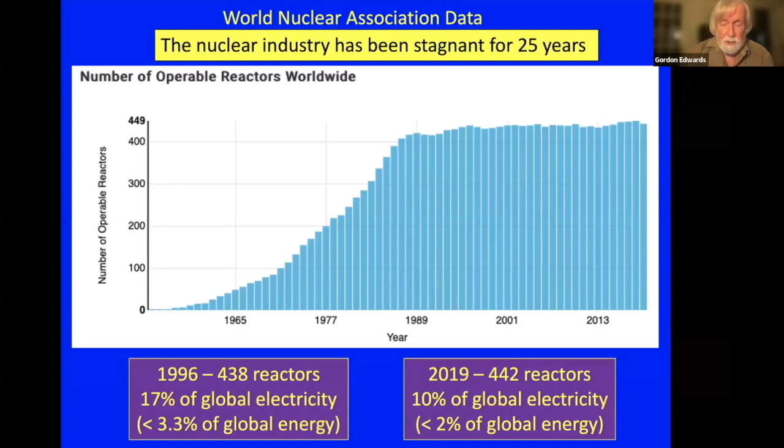And the actual share of global electricity provided by nuclear has gone down in that period from 17% to less than 10% today. And of course, electricity is only one slice of the energy pie. So that 17% 25 years ago represented only 3.3% of global energy. And today it's less than 2% of global energy. So when people talk about nuclear energy as a savior of the climate crisis, one has to be very skeptical of the potential of nuclear to fill that enormous gap.

So the nuclear industry has realized for a long time that this stagnation is not good for the future for them. And so they launched what they called a nuclear renaissance around 2001. And at that time, they were anticipating that hundreds and maybe thousands of new reactors would be built around the world. Large reactors, we're talking here about quite large reactors, not the small ones that they're ballyhooing at the present time. But this did not work well. In fact, there were only a handful of orders.

And Westinghouse, in fact, bankrupted itself trying to build 4 large nuclear reactors down in Georgia and South Carolina, the AP1000 model. They had to declare bankruptcy. They've come out of bankruptcy since then, but they suffered $9 billion in losses from new nuclear projects. And in fact, South Carolina abandoned 2 of those 4 reactors, even though they were largely built. So they wrote off billions of dollars in debt. And the 2 in Georgia are now operating, but at a great cost.

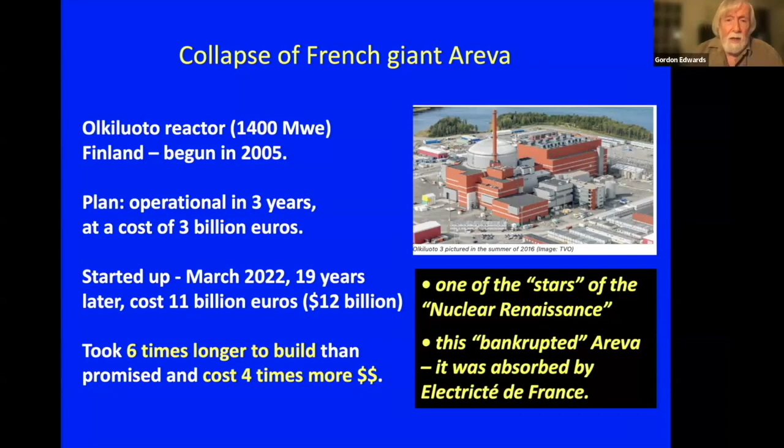And in the United States and Europe, it steadily declines to between 3 and 5% of the market, constituting a potential for market failure. In other words, nuclear might simply price itself out of the market altogether. This was also reflected in the bubble.

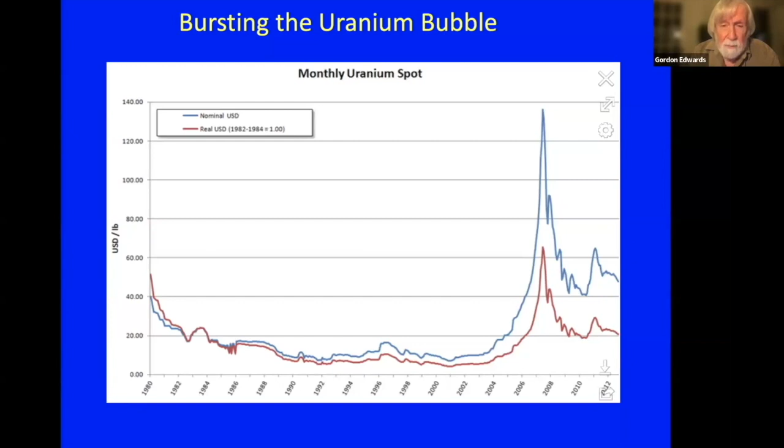You might remember the boom in uranium prices back around 2008. This is, by the way, before the 2011 triple meltdown in Fukushima. The price of uranium soared to a very high degree based on speculation about this nuclear renaissance, which in fact never really happened. And consequently, the price immediately dropped back down again and dropped even further down after the 2011 triple meltdown in Fukushima. So it was all based upon a bubble, a speculative bubble that never materialized.

So let's take a look at the competition. The competition in terms of non-carbon emitting energy is, of course, renewables. Renewable energy is primarily hydro as a solid baseload electricity, and then the more intermittent wind and solar. Well, if you compare the key expansion periods of innovative technologies using this same period, 2010 to 2020, this is the same period where the nuclear renaissance was supposed to be occurring.

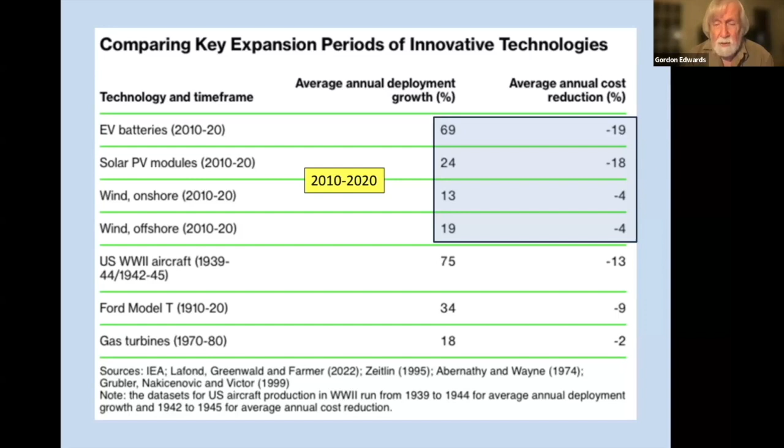And you will notice that the annual deployment growth of batteries, solar modules, onshore and offshore wind was very high. They were increasing on the average 24%, 13%, 19%. In the case of storage, 69% per year. And at the same time that it was growing in capacity, these same technologies were dropping in price like a rock. For example, solar PV modules, that's solar photovoltaics, were dropping by about 18% per year in terms of price. So the price was dropping like a stone, and it made it much more affordable. And very quickly, it outpaced nuclear, which was getting more and more expensive as time went on. The renewables were getting cheaper and cheaper and more abundant.

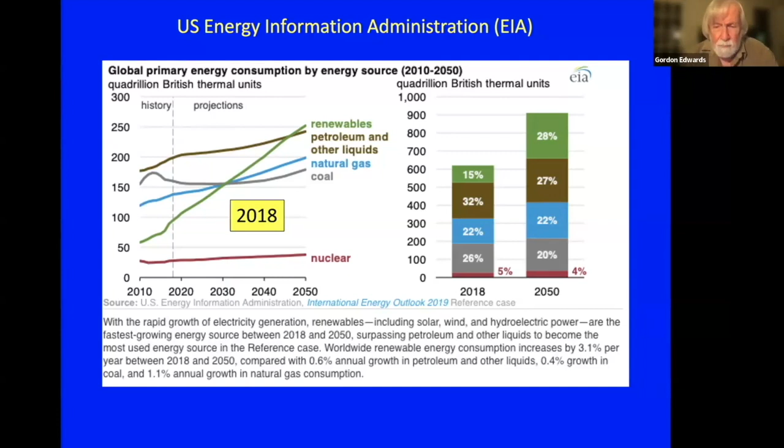So the bar graph on the right shows that even the bottom level, which is the nuclear, even while it's increasing in quantity, it's decreasing in market share. So it's going down, for example, here from 5% to 4%. So that's basically the problem that nuclear has. It's got much cheaper alternatives, the competitors that it's combating with for the market share.

So nuclear is fighting an uphill battle because wind and solar at the lowest levels is more than 3 times cheaper than nuclear. So you can build 3 times as much, and it's much faster to deploy. So it means that you can build it faster, and you can also spend less money, and therefore have more money left to build more. So it sounds pretty obvious that nuclear is not the best investment if you want to get quick results. Obviously, the fastest and cheapest option is renewables.

And it's strange that Canada and the Canadian provinces seem to be placing an emphasis on nuclear, which is the most expensive and the slowest and the most speculative, because the nuclear projects that are being proposed have never been built before and they've never been tested before. Whereas the wind and solar, they have been tested, they work fine.

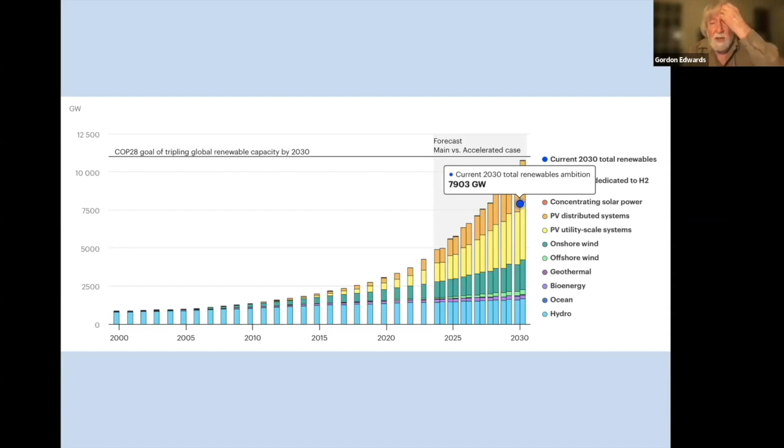Now, here is a COP28 goal of tripling global renewable capacity by 2030, showing what happens up to 2024. And already the renewables are doing very well. If you just extend that trend, you can see that it is perhaps feasible to achieve the tripling by 2030. Right now, the blue dot there represents the current ambition, the current estimate of 7,900 gigawatts. We're hoping that we can step it up and increase the installation of renewables by more than that to get

that tripling. Now, the International Energy Agency has predicted that in the next 10 years, 90% of all new electricity production facilities worldwide will be renewable.

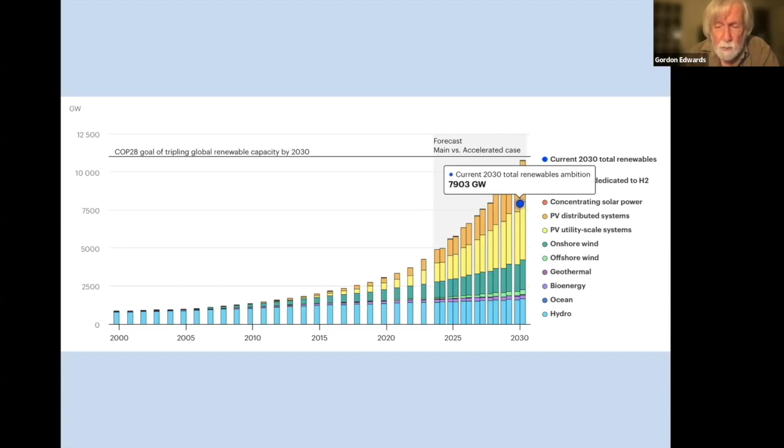So now, just as an indication, oftentimes people are concerned about the actual capacity of renewables to meet electricity needs. So I'm putting this in here. It's a little bit out of context, but the current electrical capacity in Michigan is a bit more than 30,500 megawatts. The potential for offshore wind in Michigan, according to studies that were carried out by, well, the article is represented there: Offshore wind in Michigan, great potential, many challenges.

The potential for offshore wind in Michigan is over 320,000 megawatts. That's more than 10 times the current capacity, and it's about 1/4 of total US electrical capacity. So there are great potentials if you take a look at what is possible to be done. Obviously, there are many practical obstacles that would interfere with that, navigation being one of them.

So let's now take a look at what the problem is with nuclear power. Why is nuclear power not able to compete better with the renewables? Why can't they strip down and produce cost savings and strip down the time? So let's take a look at the nature of the beast.

In 1943, Canada's first early involvement with nuclear came as a result of World War II plans. In 1943, our Prime Minister, Mackenzie King, met with Roosevelt and Churchill, and they signed an agreement to cooperate in building the world's first atomic bombs. Now, the reason why Canada was involved in that is because Canada was the main supplier of uranium. In North America, the only really readily available source of uranium was in Canada as a result of an earlier radium mine that operated in the Northwest Territories.

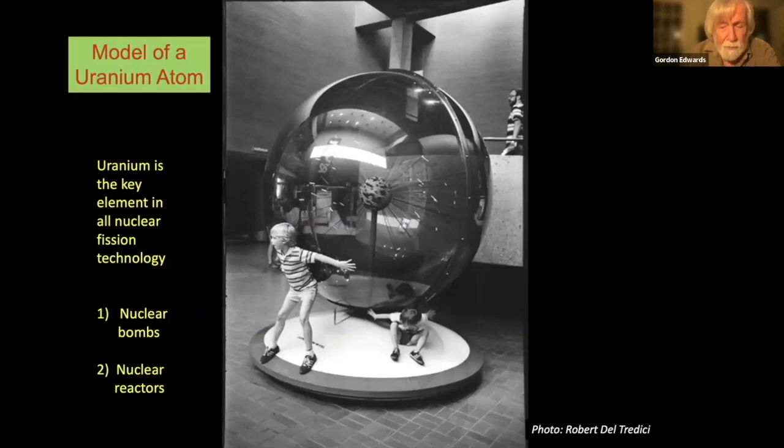This was first indicated way back in 1896 when Henri Becquerel in Paris discovered radioactivity of uranium ore. He discovered that if you took a rock containing uranium, it would give off a kind of invisible radiation that would develop a photograph, would cause shadows on a photographic plate, even though the photographic plate was wrapped in thick black paper.

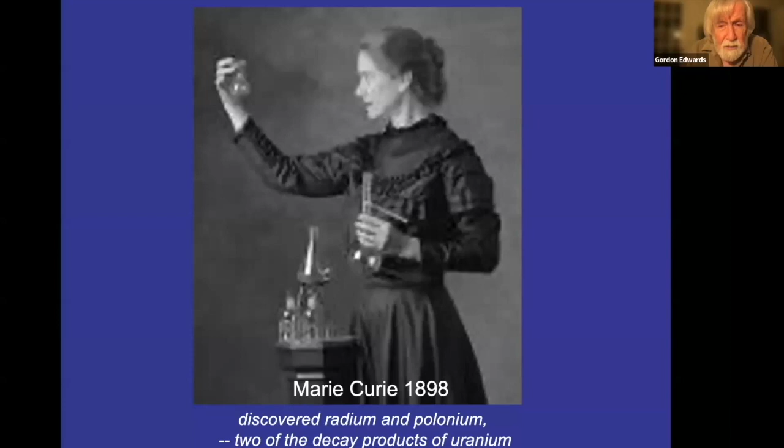Now, a couple of years later, Marie Curie, who was a brilliant chemist, crushed up the uranium rock that Becquerel was looking at, and she discovered that when you extract the uranium chemically, it is radioactive indeed, but the leftovers, the crushed rock, is actually much more radioactive than the uranium itself. 85% of the radioactivity is in the crushed rock. And she discovered two elements called radium and polonium that are actually byproducts of uranium.

By the 1920s, it was realized that handling radium is deadly dangerous. These young teenage girls, thousands of them, were used to paint dials with radium paint to make them glow in the dark without any external source of energy. And they developed horrible deaths from fatal anemia, from bone cancer, and from head cancers later on. First, it was demonstrated that they had something called radium jaw, where their teeth were falling out. And when the dentist tried to repair the teeth damage, the jaw bones would break at the slightest provocation.

So the jaws, the bones of the body, in fact, were being weakened. Later, there were fatal anemias and then bone cancers, an epidemic of bone cancers and head cancers. By the end of the 1930s, by the beginning of World War II, it was realized that radium was far too dangerous for any commercial use.

Meanwhile, underground miners developed lung cancer. The people who were mining the radium ore in Navajo country, and that was due to radon gas. And that was found out way back in 1930. They knew that it's the leading cause of lung cancer among non-smokers. Now we know that. And it was determined that it caused lung cancer in underground miners. For hundreds of years, this had been happening in Czechoslovakia without people knowing what the cause was.

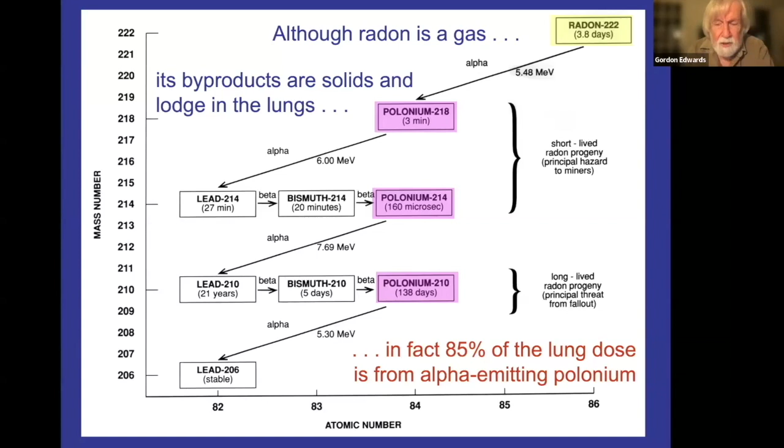Although radon is a gas, and if you breathe it in, you will breathe it out just as easily, it actually turns into solids. When the radon atoms disintegrate, they turn into polonium atoms, and polonium is extremely dangerous. Most of the damage to the lungs is done by the polonium that's deposited there.

It was at that point I investigated and I found out that polonium, according to the American Health Physics Society, is probably the cause of up to 90% of the deaths that are attributed to tobacco, because when tobacco plants grow, they use radioactive fertilizer on the crops, and radon gas produces polonium that is absorbed into the tobacco leaves and harvested and ends up in the cigarettes.

Meanwhile, the Los Alamos National Laboratory in Los Alamos, New Mexico, pointed out that weight by weight, polonium-210 is 250 billion times more toxic than hydrogen cyanide, which is one of the fastest acting deadly poisons that we know chemically. So the main point here is that tiny, tiny amounts of radioactive materials can be extremely dangerous.

Now, the radioactive disintegration that occurs, we now know, consists of giving off particles and rays, gamma rays, alpha and beta particles, which do a lot of damage to living tissue, in particular by damaging DNA molecules, causing biological organs to grow improperly, to grow abnormally, and leading to cancer and a number of other problems that can be very serious, including genetic disabilities that can be passed on to future generations.

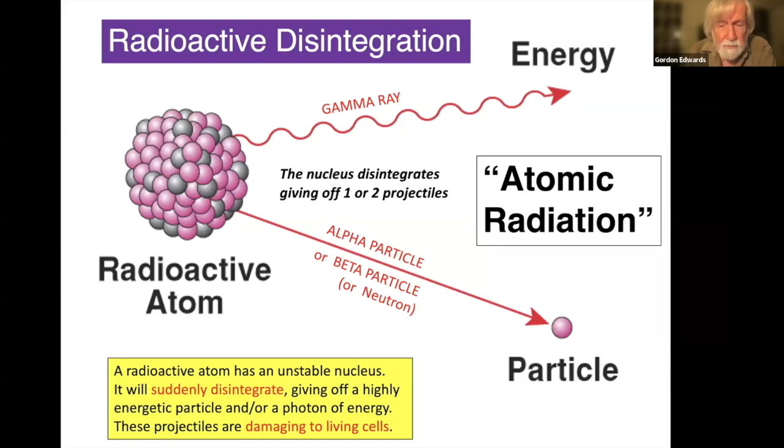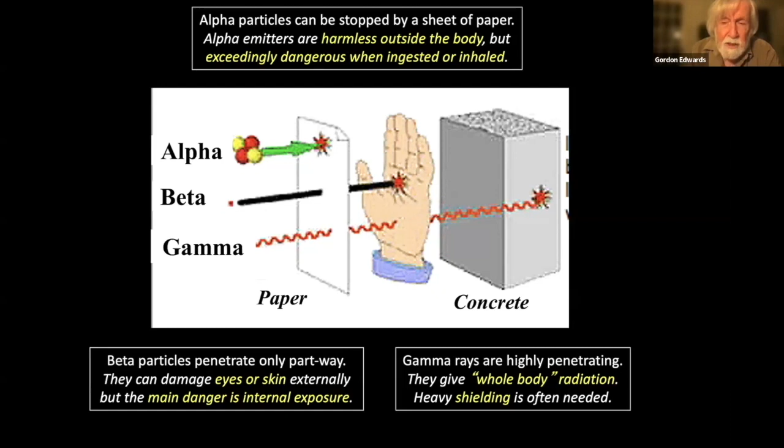Now, some of this radiation is not very penetrating, much to some people's surprise. For example, alpha radiation cannot penetrate through a piece of paper, and yet it's hundreds to thousands of times more dangerous than gamma radiation once it's inside the body. So if you have an alpha emitter that gets inside the body, it can do an awful lot of damage, especially since it lodges there and gives radiation over a long period of time.

But what it does is it damages the cells in the immediate vicinity, and those cells can many years later, up to 20 or 30 or 40 years later, develop into fatal lung cancers. And these lung cancers have a very high mortality, well over 95%.

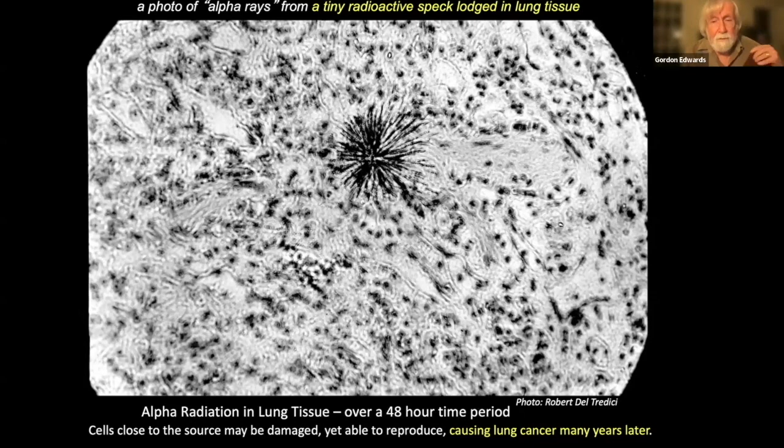So they knew this way back in 1931. As early as 1931, there were documents produced by the Canadian Department of Mines stating that lung cancer, bone necrosis, and rapid anemia are possible diseases due to the deposition of radioactive substances in the cell tissue or bone structures of the body.

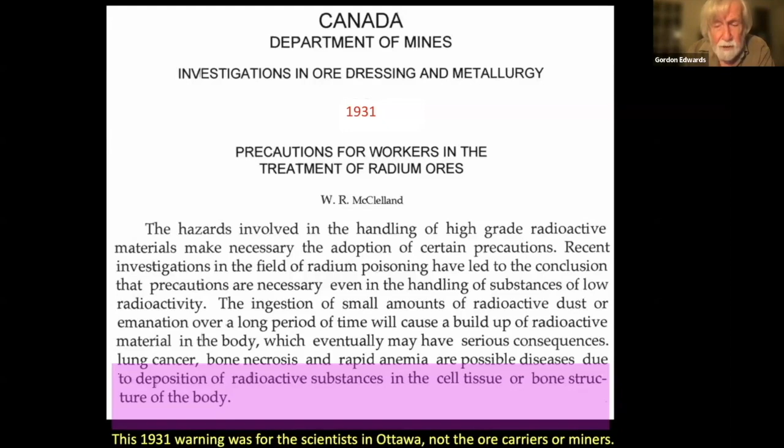This warning was for the scientists in Ottawa who had to handle small amounts, not the ore carriers or miners in the Northwest Territories who actually faced large exposures from this material. And as a result, the village up in the Northwest Territories called Deline is now sometimes called the Village of Widows, because so many of the men have died as a result of exposure to this radioactive material.

Now, when we mine uranium in Saskatchewan or elsewhere, we leave behind the crushed rock, which Marie Curie looked at. These are the radioactive uranium tailings, and they contain all the polonium, all the radium, and all the radon gas that was in the ore originally. And the effective half-life of this material is 76,000 years. It'll take 76,000 years for the amount of each one of those materials to diminish by a factor of a half.

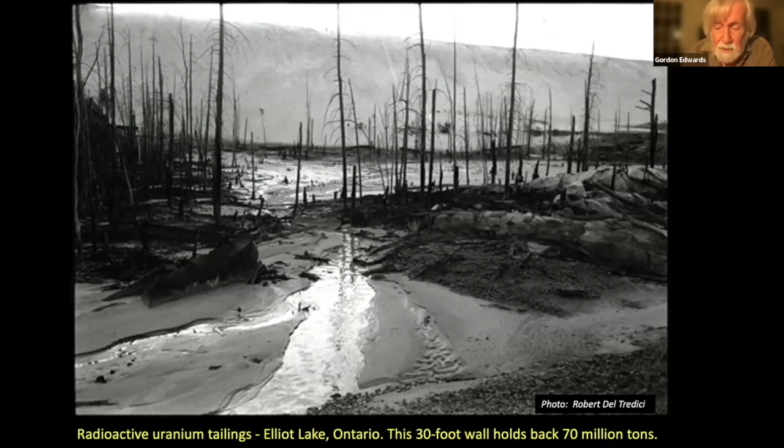This 30-foot wall that we show here is in the Elliot Lake area of Ontario. It holds back a lake of 70 million tons of radioactive sand from uranium mining. A permanent legacy. Radioactivity is a form of nuclear energy that cannot be shut off, and that's why we have a nuclear waste problem.

So everything changed in 1938. Christmas 1938, all of a sudden they discovered that trigger that was not known before. That trigger is called a neutron. A neutron can actually act as a trigger to release an awful lot of this nuclear energy all at once by starting what's called a nuclear chain reaction.

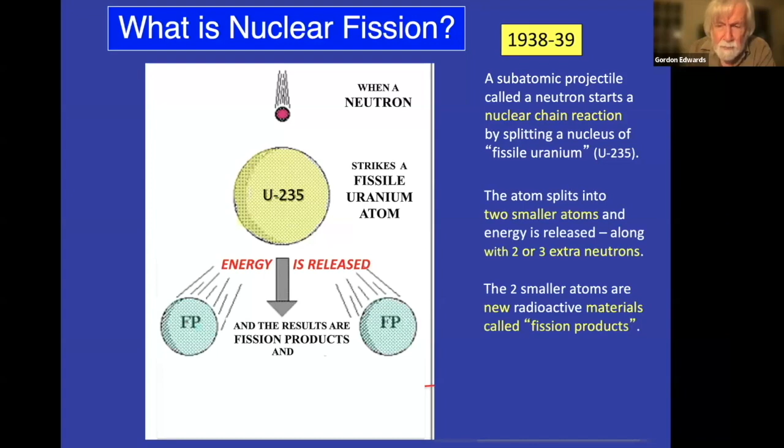When a neutron hits an atom of uranium-235, a rare form of uranium, it can split the nucleus and you get two smaller atoms given off, which are called fission products, along with 2 or 3 extra neutrons. Those extra neutrons trigger more fissions, and some go on to produce even more radioactive waste than the fission products. So this is where the radioactive waste comes from in a nuclear reactor or in a nuclear bomb. And this is where the energy comes from as well.

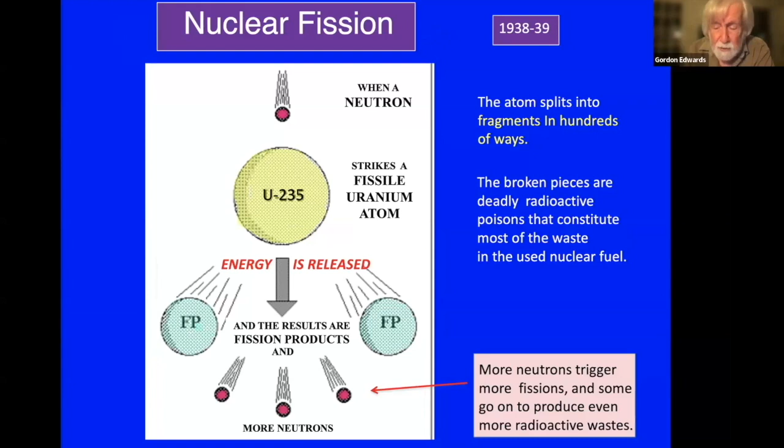So in Canada, although we contributed to the atomic bomb project by selling uranium to the American military, we decided to go for the peaceful uses of nuclear energy. And we built CANDU fuel bundles and CANDU reactors that could harness this energy hopefully for good, so that we could produce abundant energy without emitting carbon dioxide, although that was not a major consideration originally. Now that's certainly an advantage.

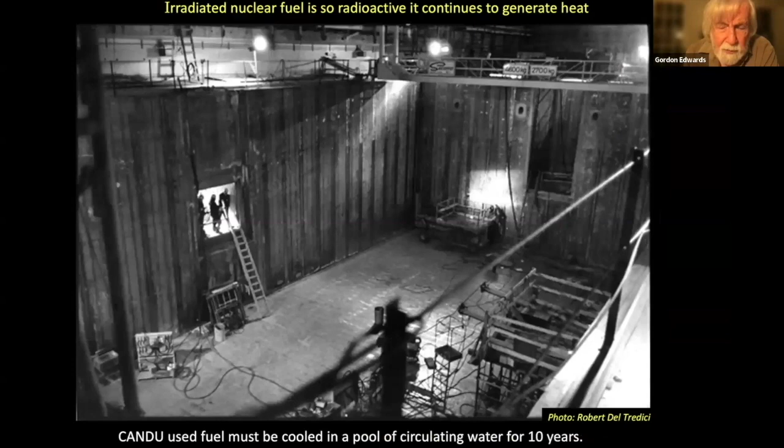And so the heat from the disintegrating atoms in a nuclear reactor is sufficient to melt the core of the reactor, even after the reactor is shut down. So if you shut down a reactor immediately, you still have about 7% of full power heat being generated by the radioactivity alone. And that's enough to melt the core of the reactors. That's what happened at Fukushima back in 2011. Those reactors were safely shut off before they started melting down.

In Canada, we have a spent fuel pool about 40 feet deep, in which the fuel has to be stored. The used fuel has to be stored for about 10 years in circulating water in order to keep the fuel from overheating spontaneously, which it will do if it didn't have that cooling water there.

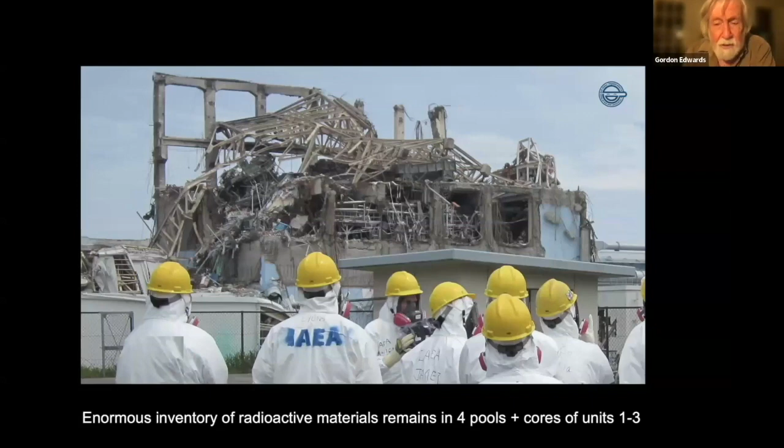Here is the result of that kind of an explosion in Fukushima. The reactor is really destroyed, not by the tsunami, not by the earthquake, but by the internal forces of the uranium fuel in the reactor. It's just the heat generated by the reactor and the chemical reactions induced by that heat that caused this destruction.

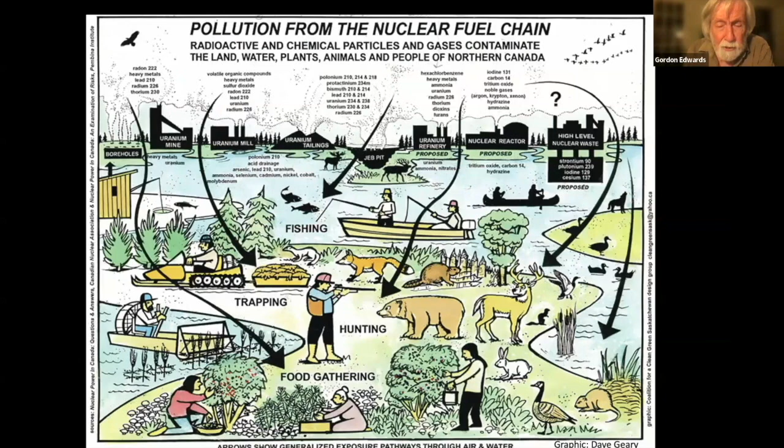Dave Geary of Saskatoon made this wonderful graphic showing how radioactive materials are materials after all, and they do have chemical properties. And depending on their chemical properties, they go into the food chain, the water, the air, and the human body, and they follow the same pathways that non-radioactive materials would follow. For example, radionuclides are chemical substances that are also radioactive, and they go to different organs depending on the chemistry.

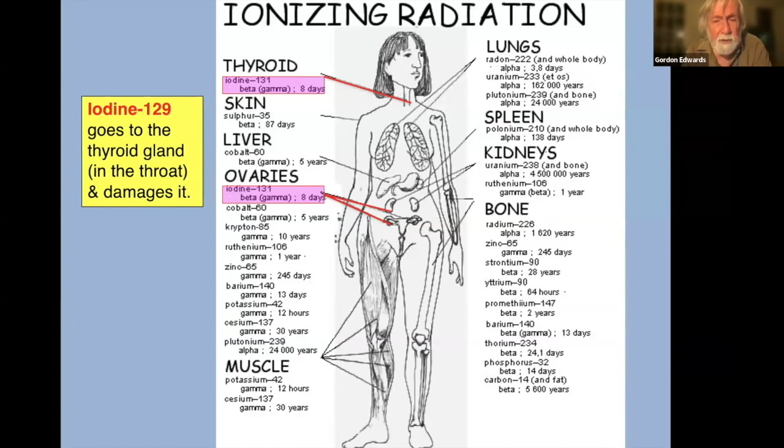For instance, iodine-129 or iodine-131 are radioactive versions of otherwise non-radioactive iodine. Iodine in nature is not radioactive, but these ones are. So nuclear power creates what you might call radioactive twins of non-radioactive materials. It goes to the thyroid gland and it damages it and causes thyroid cancer and other disorders. Cesium is another example. It goes to the soft tissues of the body, the blood and the soft organs, and therefore it contaminates meat, makes it unfit for food.

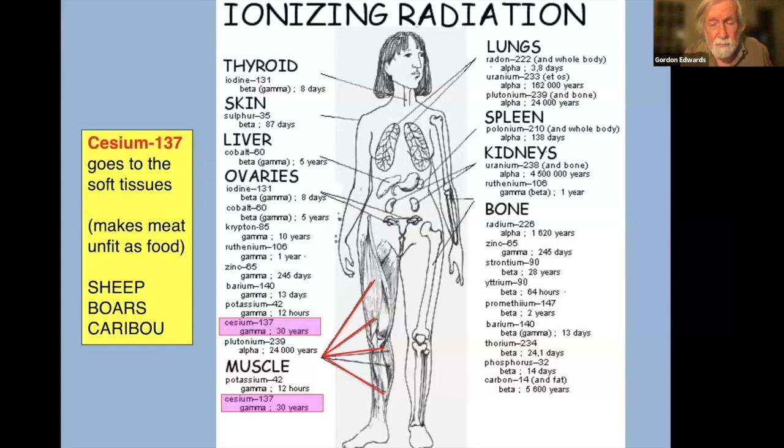For example, sheep farmers in northern England and Wales could not sell their sheep meat for 20 years after the Chernobyl accident because of radioactive contamination of the meat. Even today, hunters in Germany, Austria, and the Czech Republic, if they kill a boar, they can't eat the meat because it's too radioactive. The boars are very good at accumulating this radioactive cesium into their tissues. Here in North America, the caribou received more radioactive fallout than any other animal from the Chernobyl accident.

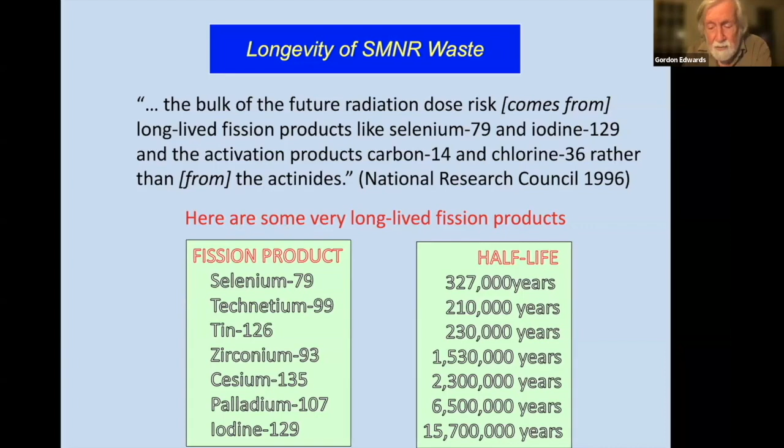And as for the longevity of these wastes, the bulk of the future radiation dose comes from long-lived fission products like selenium-79. Notice selenium-79 has a 327,000-year half-life. Technetium-99, a 210,000-year half-life. Cesium-135 is a 2.3 million-year half-life. Iodine-129 is almost a 16 million-year half-life. So that's why these wastes remain dangerous for a very, very long time. It's not a question of just waiting for a few decades. No, you really have to keep it out of the environment of living things forever if you want to have a hygienic environment.

As I mentioned earlier, the lethality of a freshly removed fuel bundle is such that a person standing within a meter of it would die within an hour. He'd get a lethal dose in 20 seconds, but it'd take him an hour to die. Now, a fuel bundle looks solid, but radioactive materials do leak out through tiny pinholes and cracks. Severe fuel damage causes massive leaks. And of course, if you have a meltdown, then you get a huge release of radioactive materials.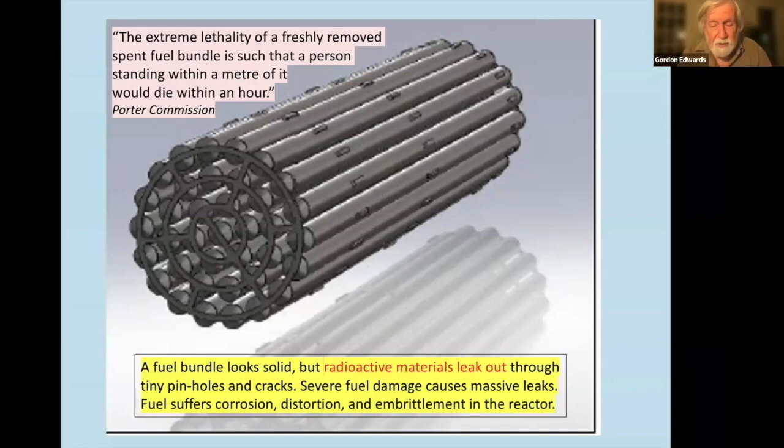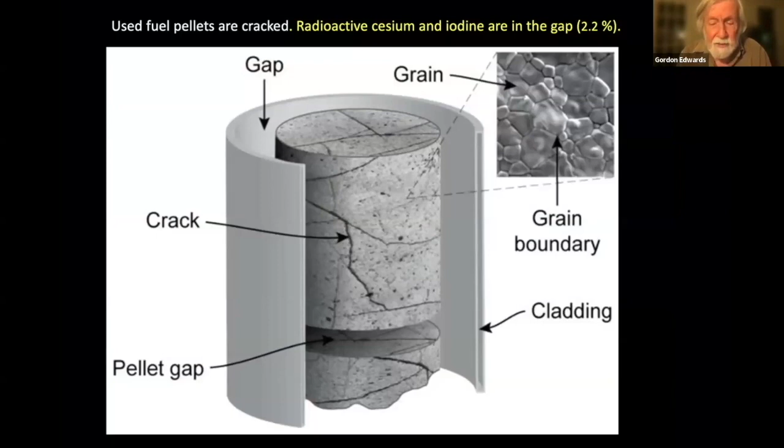As the fuel pellets, I showed you one of those fuel pellets earlier, they look very solid. They're solid ceramic materials originally, but in the reactor, when they're being used, they crack and they fissure, they become fractured. And a lot of the radioactive materials end up in the gap between the pellet and the cladding, the coating outside it. And so therefore it can be released immediately as a kind of a gas. This is true of radioactive iodine and radioactive cesium in particular.

When a CANDU reactor is operating, all the new radioactive materials are created in the core, the reactor core where the fuel is. But because the fuel bundles do leak, some of that radioactivity goes throughout the primary heating system, and the central part of the steam generator ends up being highly radioactive, because of the accumulation of material that's leaked out of those fuel bundles.

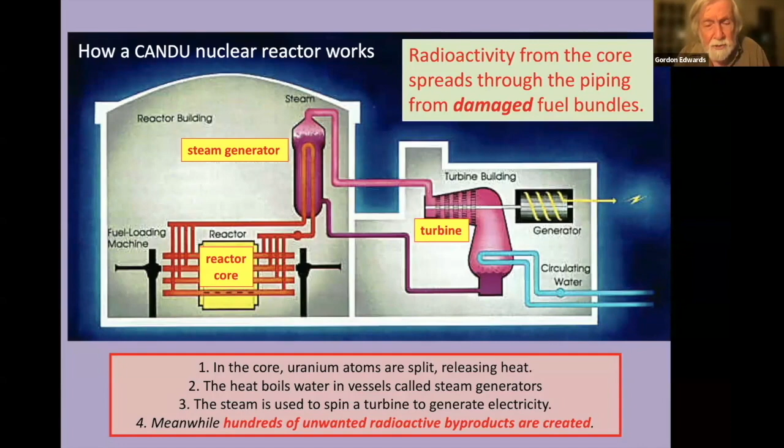This is one of the reasons why it's difficult for reactors to be small. In order to make them small, you have to reduce the shielding. And if you reduce the shielding, then you endanger the workers or possibly the public. And you also provide less of a barrier between the radioactive waste and the environment outside.

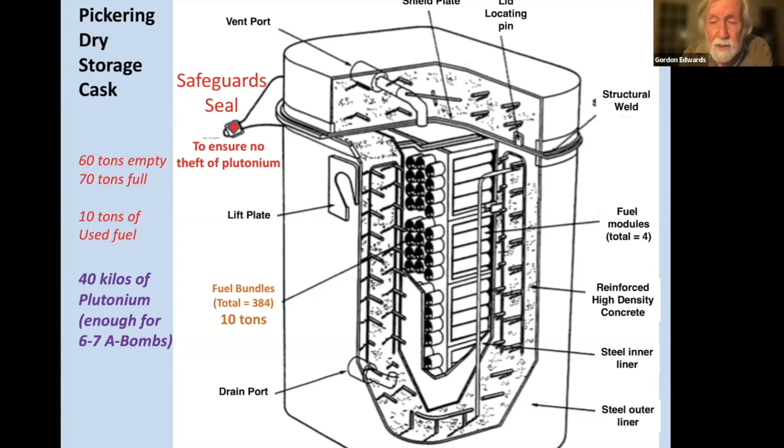You'll notice at the very top, there's a little red thing called a safeguard seal. That safeguard seal is for international inspectors to verify that nobody has gone into that container and taken out the plutonium. There's about 40 kilograms of plutonium, which is enough for 6 or 7 atomic bombs, inside that dry storage container, because every nuclear reactor simultaneously produces plutonium as a byproduct, which is heavier than uranium. It's not a fission product, but it is a result of nuclear fission.

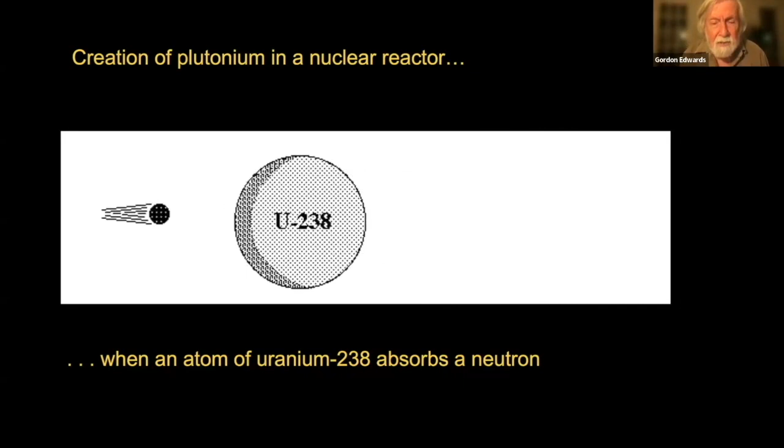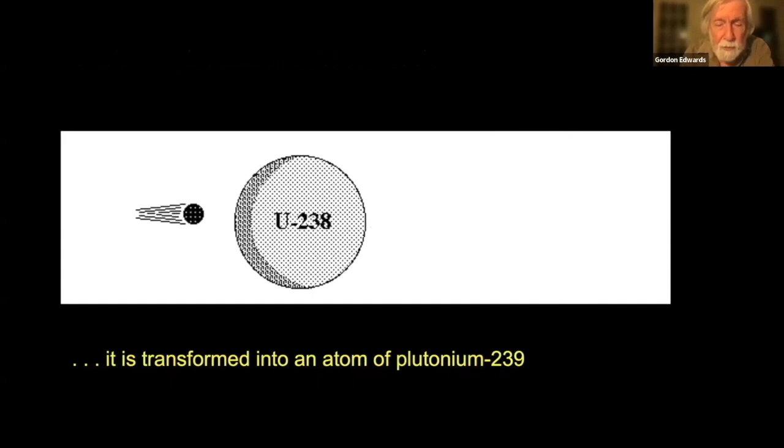What happens is that there's a type of uranium called uranium-238. And when it gets struck by a neutron, instead of splitting, it turns into a new material called plutonium-239. And that plutonium-239 is the raw material for most of the atomic bombs and nuclear weapons in the world today. In fact, it's not available in nature. You can't find a plutonium mine except in places where we've created a plutonium mine.

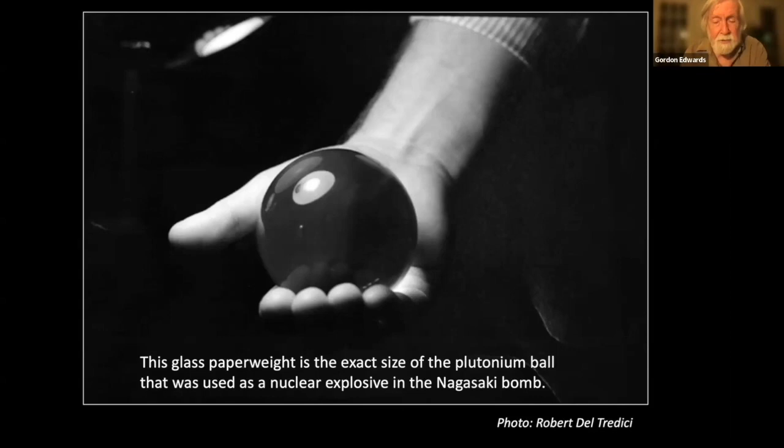When we sell reactors overseas, we're creating a plutonium mine because the spent fuel is the plutonium. That's the container of the plutonium. Anybody, many thousands of years into the future, can go to that waste and extract the plutonium from it and use it to make atomic bombs. This glass paperweight is the exact size of the plutonium ball that was used as a nuclear explosive in the Nagasaki bomb. So that's really one of the major considerations.

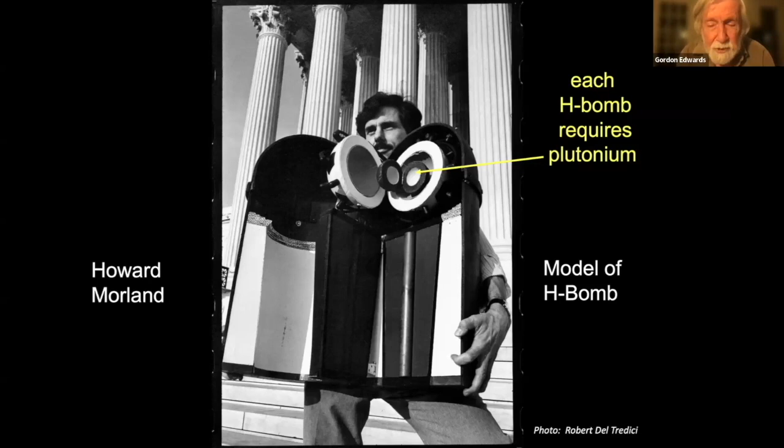By the way, plutonium is also required for even the much more powerful H bombs. They have to have plutonium as a trigger to get them started. You detonate the plutonium, it's a small plutonium atomic bomb, just to raise the temperature to 100 million degrees Celsius, which ignites the fusion weapon. And those fusion weapons can be 1,000 times more powerful than the Hiroshima bomb.

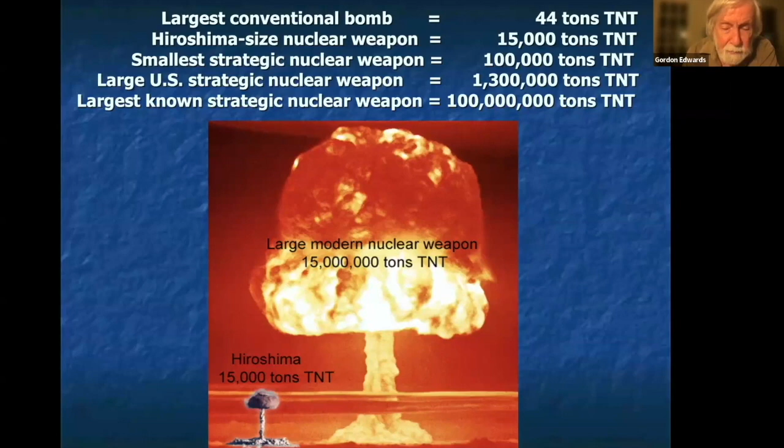The Hiroshima bomb, in fact, is now considered to be a very small bomb, and they don't make them that small anymore for the most part. Most of them, even the ones that go in the head of a cruise missile, are about 15 times more powerful than the Hiroshima bomb. So that's one of the major concerns people have about uranium: the connection with nuclear weapons.

Now, in order to make the Hiroshima bomb, they had to increase the concentration of U-235, which is only 0.7%. That means 7 atoms out of 1,000. That's the red. 7 atoms out of 1,000 are uranium-235. That's not enough to make an explosive. You've got to increase that percentage as high as possible. If you get it up to about 90%, then you have what's called weapons-grade uranium. That's what the uranium in the Hiroshima bomb was made from.

Now, here in Saskatchewan, they're talking about building an eVinci reactor, a small nuclear reactor that only generates about maybe 5 megawatts of electricity, only about 15 megawatts of heat. It's very small, but the fuel that they're going to use in that reactor is almost highly enriched. It's 19.75%. If it gets to 20%, it's called highly enriched, and everybody agrees that highly enriched uranium is a danger for weapons users because they can make nuclear weapons from that.

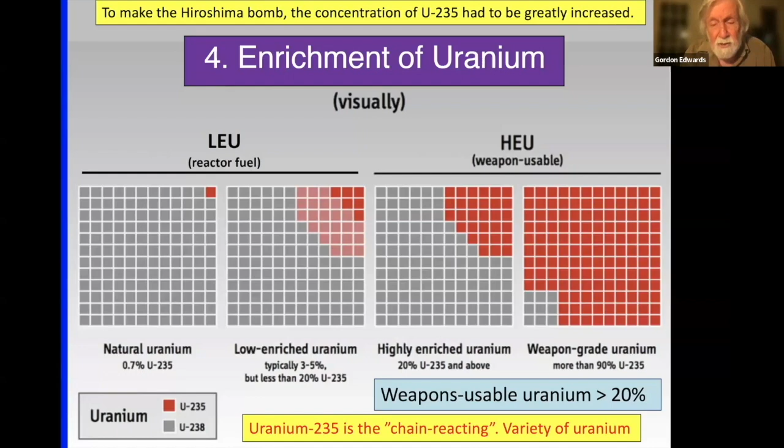Well, guess what? They've now discovered that that 20% is not a firm cutoff point. 19.75% is almost certainly weapons usable. And there's articles now in Science Magazine about the usability of uranium that's low enriched, but very close to being highly enriched, that they can be used in weapons also. So there's a very real concern here about proliferation when we use these kinds of reactors.

So let's turn now to small modular nuclear reactors. The whole idea of the nuclear industry is that, look, we're not doing well. Our industry has been stagnant for 25 years. Our market share has gone down from 17% to 10%. Now it's about 9%. So we need to somehow break out of this doldrums. Since we can't sell the large reactors, let's try and sell small reactors. We'll call them small modular nuclear reactors. And that's the flavor of the day for the nuclear field.

And notice, by the way, they conveniently leave out the word nuclear in their acronym. They call them SMRs, whereas I insist upon calling them SMNRs, because it's actually the N that causes all the problems. All fission reactors create radioactive waste and nuclear weapons material, plutonium. Small modular nuclear reactors are not clean, not small, not green, not affordable, according to me and my organization. And part of the reason for that is they simply don't mention those things that make nuclear power uniquely undesirable. They don't talk about the radioactive waste. They don't talk about the reactor accidents that can occur. And they don't talk about the nuclear weapons proliferation aspects of all these reactors.

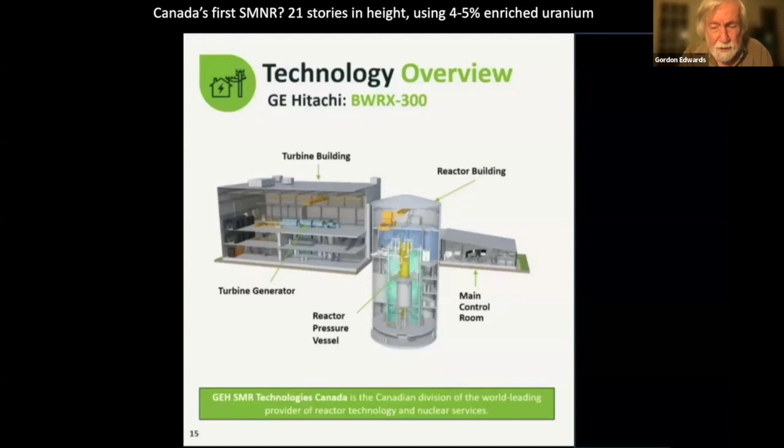It's also not modular because you have to have a workforce of about 1,000 people to dig the hole and build this whole structure underground. The core of the reactor, where all the radioactivity is, and all of the control mechanisms are underground, and they are also surrounded by water because this whole excavated cylindrical hole will be filled with groundwater, and it's only about a couple hundred meters from the shore of Lake Ontario. So it's a very unusual design, and it seems to be designed to try and minimize how big it really is.

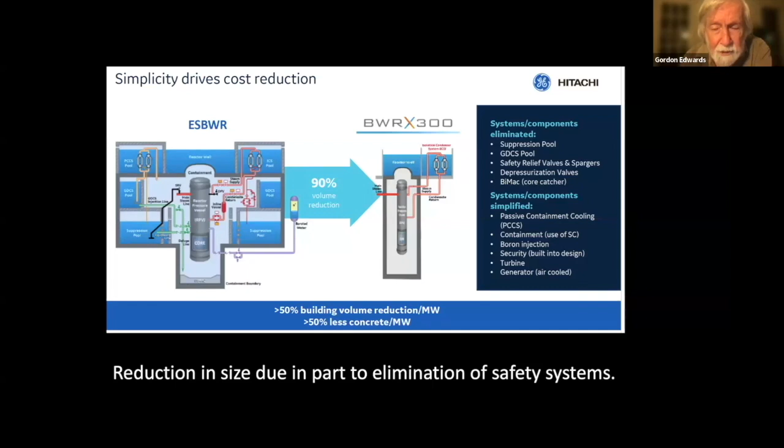If there's a loss of coolant, or if there's any kind of overpressure, that small tank of water is supposed to do the job in all those eventualities. Now, the U.S. Nuclear Regulatory Commission has not yet licensed this, the smaller one, because they still have questions about the safety of it. But right now, there are hearings underway in Ontario to license the building of this reactor, even though the design is incomplete and many of the safety questions have remained unanswered.

Here in Saskatchewan, you're also talking about a new reactor I mentioned earlier, the eVinci reactor. You may know that the Saskatchewan Research Council has been given $80 million by the province to investigate this particular design. And they want to build a model somewhere in Saskatchewan, maybe in the Elbow region, maybe in the Estevan region, in order to see how it works. And this is the reactor that I mentioned before, has 19.75% enriched uranium.

Now, when you enrich the uranium, that means you also enrich the fission products by the same amount. So this particular fuel is about 28 times more concentrated in U-235 than ordinary CANDU fuel, Canadian CANDU reactor fuel. And that means the fission products are also about 28 times more intense in the used fuel. So in fact, the radioactive inventory in this very small reactor, 15 megawatts of heat, would be equivalent to a CANDU reactor generating 420 megawatts of heat. So even though it's a small reactor, it has a hell of a lot of radioactivity in it, far more radioactivity by a factor of about 30 than any CANDU reactor today existing.

They say that they're going to put this reactor in place and then take it away again after it's finished. Well, I don't know exactly how they're going to shield the workers when they take it away, because it's going to be extremely radioactive, and because it's small, it doesn't have a whole lot of shielding to protect people.

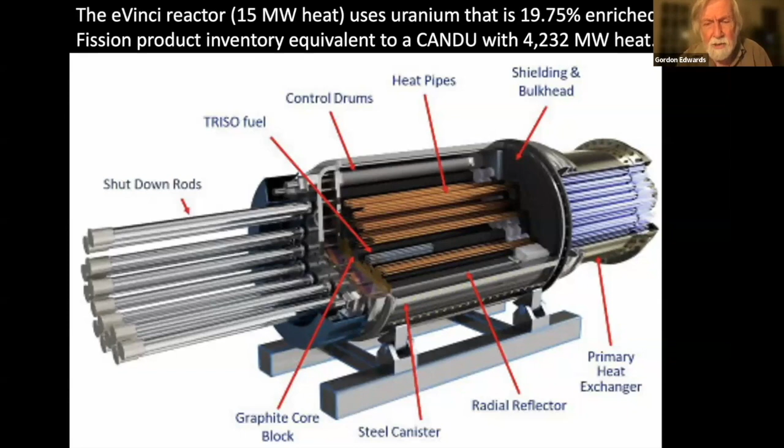It also doesn't have much of a barrier to the environment in case there was something, well, for example, like a military attack. I mean, I know that that's not likely in Saskatchewan, but if they want to sell these reactors in other countries, it could easily happen. Look at what's happening in Ukraine right now. And this reactor has nowhere near the ability to withstand a military attack that those large reactors have that are now at Zaporizhia in Ukraine.

So there's another factor that we have to be concerned about, and that is that more and more the nuclear industry in Canada is talking about recycling the fuel, the waste fuel. Now, when they talk about recycling it, what they really mean is to extract the plutonium and leave the rest of the crap behind. So what they really want to do is take the plutonium out and use the plutonium as fuel. It can not only be used as a weapons material, it can also be used to fuel a nuclear reactor. But in doing that, you have to destroy the fuel bundles.

You have to release all the radioactive materials inside, and those things cannot be recycled. Those things end up being radioactive waste, which then have to be resolidified and stored for the next 10 million years. So I've given you an article there, Reprocessing Revisited, a 2008 article by two gentlemen who are very knowledgeable about this whole topic, Edwin Lyman and Frank von Hippel. So I recommend that article to you.

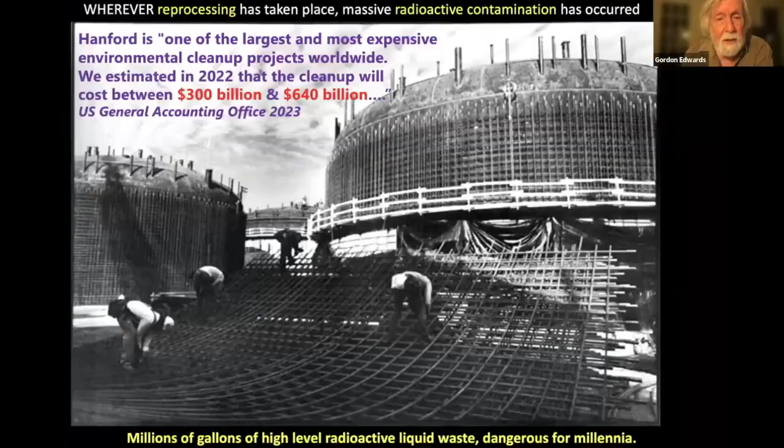Now, in 2023, just last year, the U.S. General Accounting Office, now it's called the U.S. Government Accounting Office, so I apologize for using the wrong name there. It's the Government Accounting Office now. It used to be called the General Accounting Office. It says that Hanford, this is out in Washington State, Hanford is one of the largest and most expensive environmental cleanup projects worldwide. We estimated in 2022 that the cleanup will cost between $300 billion and $640 billion. Imagine.

Now that's from reprocessing. This was a military operation to extract plutonium for military use. However, civilian reprocessing would also be very damaging as well because of the extreme difficulty in containing all the radioactive materials that are in the spent fuel. Here we have several hundred tanks of high-level radioactive liquid waste, which remain dangerous for many millennia.

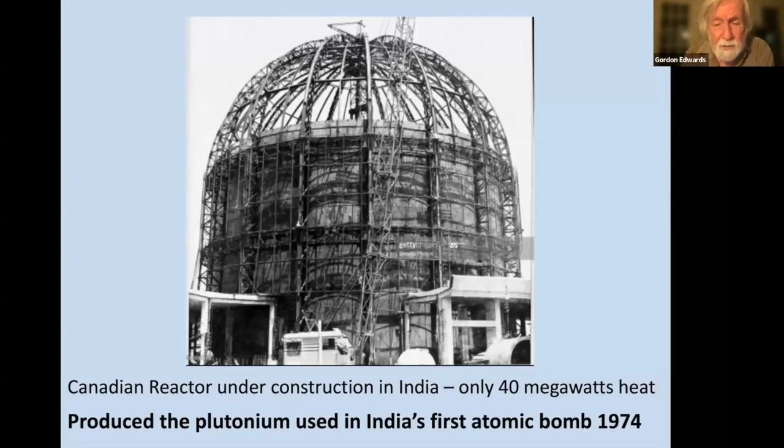Of course, when we sold a reactor, we gave a reactor, we didn't sell it to them, we gave it to them, a 40 megawatt heat generating reactor that's even more powerful, by the way, than the eVinci reactor in terms of heat. We gave that to India, and India used the plutonium from that reactor in the first atomic bomb in 1974. So the trouble is spreading these reactor technologies around gives people the ability to make atomic bombs using the leftovers.

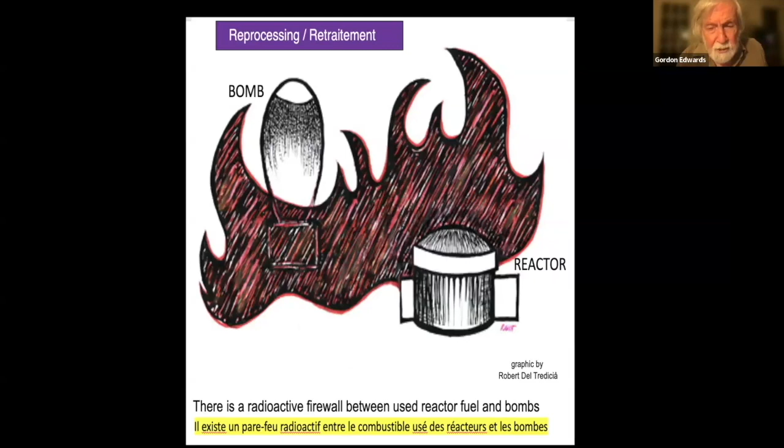Now, reprocessing, you see, the bomb is not so easy to get from a nuclear reactor for the simple reason that the radioactive waste is so damn radioactive that you can't come close to it. Anybody who tries to carry off a uranium fuel bundle, a used one, will probably die before he gets out the door. But what happens with reprocessing is you take away that radioactive firewall, and you replace it with what's called a reprocessing plant. And once the reprocessing plant is built, you can take the plutonium out the front door and use it for fuel, but you can also just as easily take it out the back door and use it for bombs.

So it's a proliferation machine for sure in terms of all the countries in the world today, especially with the demonstration. You know, Ukraine had nuclear weapons and they gave them up. Look what happened to them in terms of the relationships with Russia. North Korea has nuclear weapons and it does not give them up. And as a result, there's a kind of a standoff with the United States and the superpowers because nobody knows exactly what to do about North Korea's nuclear weapons arsenal. Well, it's not very long in the future that every country in the world could have its own nuclear arsenal if we promulgate these nuclear technologies, which are so-called advanced technologies.

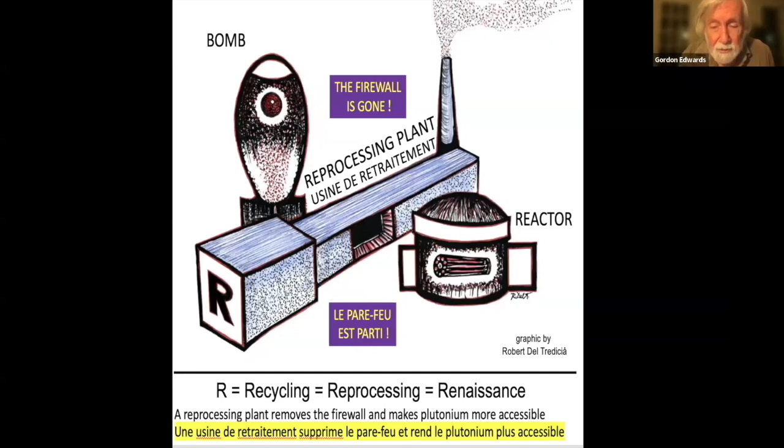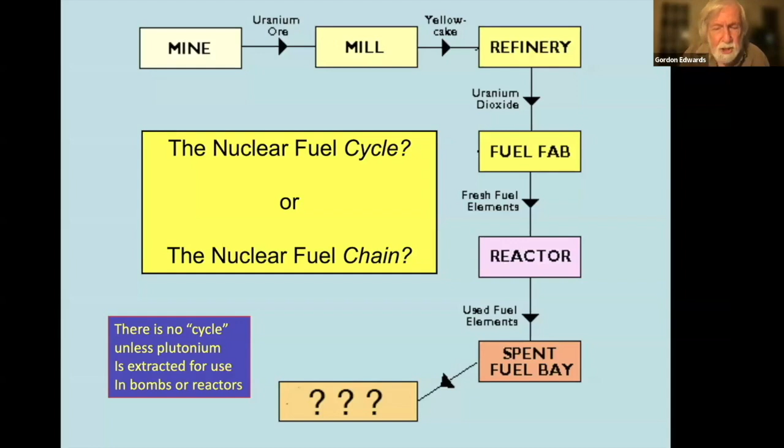These advanced technologies are more dangerous than the ones that we already have, far more dangerous in terms of the radioactive waste, which is far more radioactive per kilogram, in terms of the usable military materials, which are far more accessible than previously. So what we've done is we're in the process of converting the nuclear fuel chain, which goes from the mine to the mill, to the refinery, to the fuel fabrication, to the waste. We're turning that chain into a genuine cycle. And when we change it into a cycle, that means we have the enrichment capabilities and the reprocessing capabilities. That's the plutonium extraction, that can lead directly to bombs if you have a regime which is determined to do that.

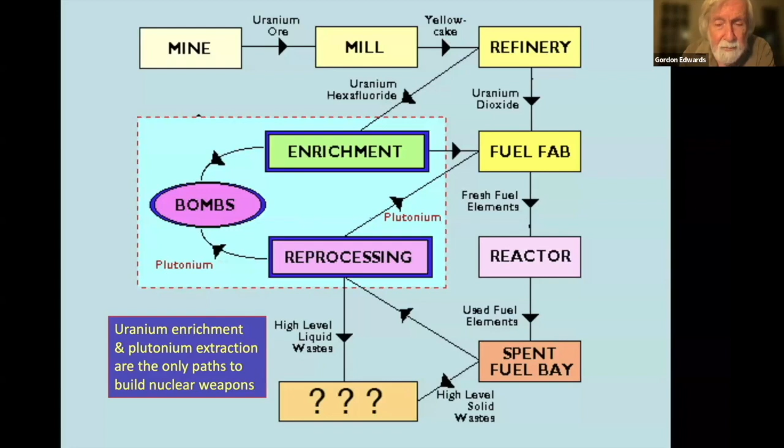And I mention once again that this conversion to bombs can be made at any time in the future. So you can't just judge by the existing regimes. You have to think about what kind of regime change might occur in the future. Look at, for example, the transition from Biden to Trump. What a dramatic transition. Look at the transition from the Weimar Republic in Germany to Adolf Hitler just a few years later. So you can't really predict what a country is going to be like in the future. And by the way, the agreements that are in place to prevent this from happening, any country can back out of those agreements with 3 months' notice. That's what North Korea did. North Korea was a signatory of the Non-Proliferation Treaty, and they simply gave notice that they're dropping out, and 3 months later, they were free to do whatever they darn well pleased.